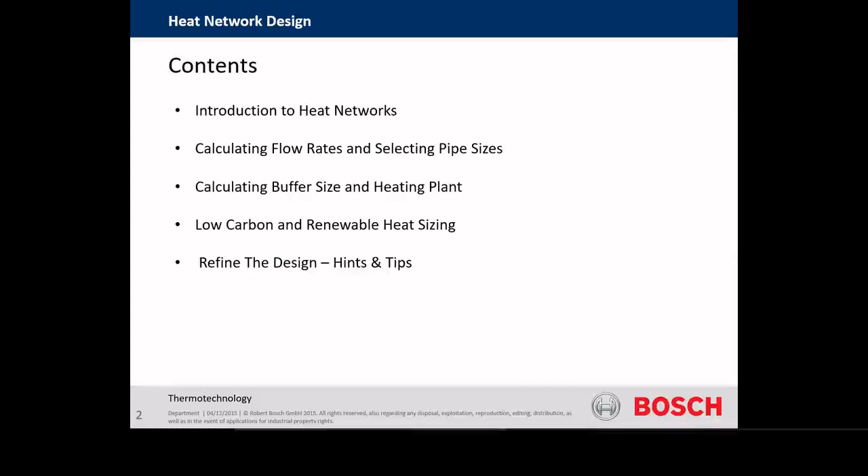So heat networks, well, as I say, probably everybody knows what a heat network is. I think it's interesting to see where heat networks fit within the decarbonisation of heat and the strategies. If we look back historically over governments' strategies for the decarbonisation of heat, at a very broad level, it pans out into perhaps three different pathways. On the one hand, we've got the all-electric pathway, which typically leads us to heat pumps as being the main technology. Some significant challenges there in getting the market going, but also concerns about how the existing grid would be able to cope with that. So some significant challenges in all sorts of areas there.

On the opposite side, on the other hand, we have the decarbonised gas route, which really leads us to hydrogen with blends and then eventually 100% hydrogen, something that we're very much involved with through Worcester Bosch, involvement with government's Hy4Heat scheme, etc. Looking very promising, but still something that's just over the horizon at the minute.

And of course, in the middle pathway, we have heat networks, and heat networks, I guess, really seen by government as a kind of no regrets policy, something that they can be getting on with now, something that is easier to decarbonize in the future, even if they come into existence not perhaps using a high percentage of renewable heat from day one. Because they are agnostic of the energy coming in, they are much easier to decarbonize in the future. And we've seen from Scandinavia that heat networks can really be a useful tool when they're done correctly, when they're done right.

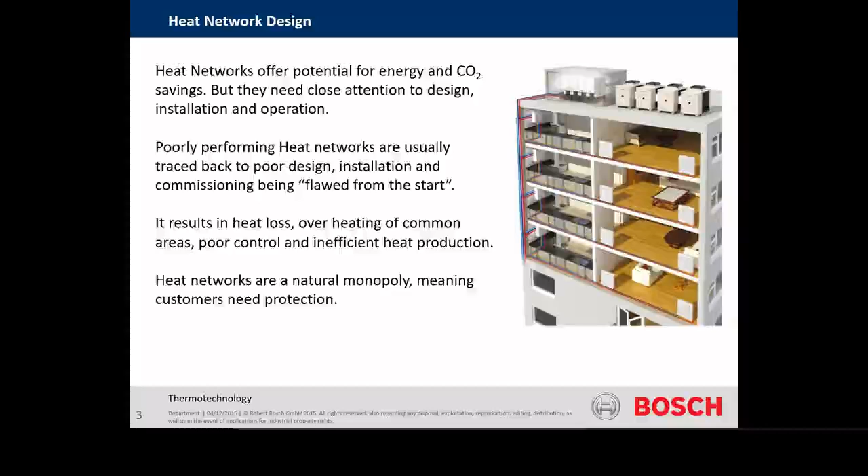So as I said, CP1 came about in 2015, as a bit of a reaction to this. It was a collaboration mainly between CIBSE and the ADE, the Association of Decentralized Energy, which is the main trade association in this area. They came together to produce this document as CIBSE's first code of practice, hence its CP1 name. So it's a little bit different to other CIBSE guides we're perhaps used to seeing.

Being a code of practice, it looks more at the stages of how to go through procuring and looking into the feasibility, etc., for a heat network. I think there was some criticism when it first came out that it wasn't a technical guide, and there was perhaps a need for technical guidance that was missing at that time. I think CIBSE and ADE subsequently came back and had a go at trying to put together a technical guide, but that ran into the sand for various reasons, people not being able to agree on the approaches that should be taken. It became quite difficult to get anywhere with that.

CIBSE also had a go at this, and for various other reasons that also petered out. In the meantime, a guy called Chris Parsloe put together a technical guidance document - he was also the main author for the CIBSE guide. I've got no connection to Chris Parsloe, but I think his guide is probably a useful stopgap if you're looking for some good technical guidance. And I understand CIBSE are looking to adopt that guide along with the next version of CP1 2020 as and when it comes out.

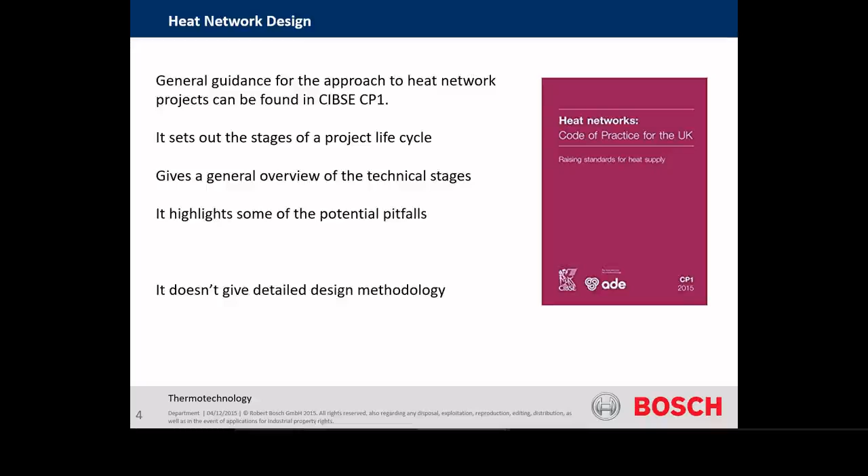So from this point on, I just want to think about a hypothetical design that we might need to do for a small heat network, and pick out some of the key stages that we go through in design, and look at a broad approach to what we need to do there.

I think certainly some of the learning has been that the approach to heat networks design needs to be quite different to what we do with standard mechanical design, in as much that there's this tendency for mechanical design to perhaps slightly over design things and oversize things, because that acts as a bit of an insurance policy - the mindset being that it gives a little bit of margin for error. But when it comes to heat networks, experience has shown there's a real need to be designing quite tightly, because if we start to oversize things and over-egg things, this leads to problems in the efficiency of the network. This is the route really where we get high heat losses and the like.

So I think the first message here is really to be sensible about what the actual requirements are for the domestic hot water flow rates, the heating requirements and the like. Because if we are sensible about this, and if we put extra effort in the front end, either through better modeling of what the requirements will be, or if it's an existing network or property that's going to be put across to a network, then we could perhaps consider some better metering and things like that going in. Certainly the more work we can put in at the early stages will pay dividends going forward.

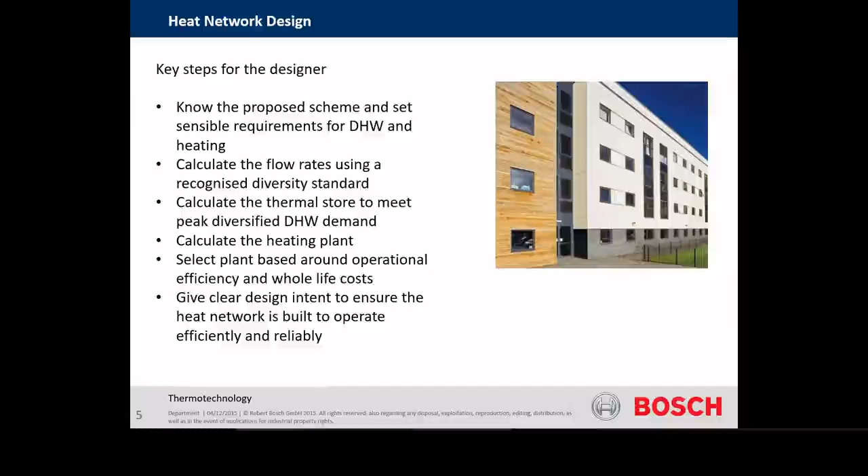So if we were going to think about our design for this small heat network, then perhaps not a bad place to start would be to be looking at the heating in the apartments. I called it the secondary heating here, but that's actually been redefined to the tertiary heating system. But I will perhaps continue to just refer to it as secondary for this presentation anyway.

When we think about the heating, CP1's original advice was to just calculate your heat losses as normal. But I think certainly the data that we see coming out of heat networks now, we're starting to see that is leading to oversizing of heating. So the advice within CP1 2020 will be that there's two routes that you could potentially follow.

You could either calculate your heat losses as normal, but then apply a diversity to the heat losses. And they've identified a Danish standard called Varmeståbi, which could be used and actually has been used by a lot of the larger heat network operators in the UK for some time. So it's pretty well tried and tested.

So you could use that diversity method, or the alternative method that they're pointing out is that you could calculate your heat losses, but don't allow for unheated, unoccupied spaces either side of where you're calculating the heat losses for. So assume 100% occupancy and think more as a block really, and hopefully that will also help you reduce your heat demands and therefore get closer to what the reality is really.

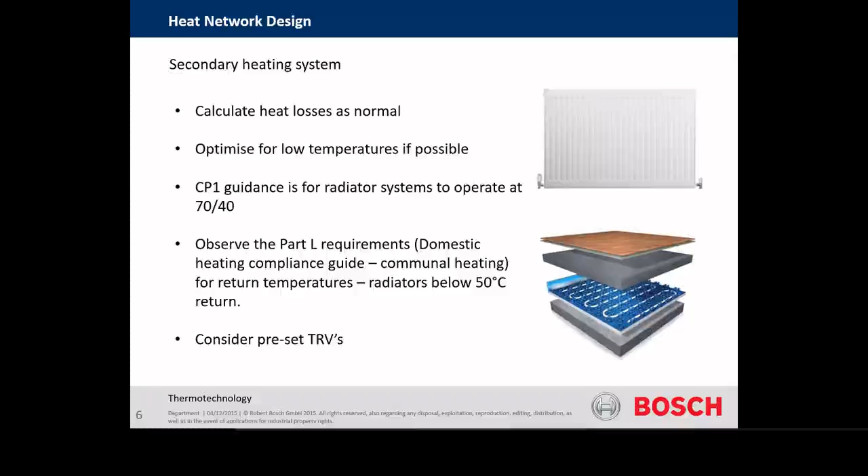So I want to turn to the domestic hot water side now. I think the key thing to take away from this is to be realistic about what your actual requirements are. We've seen in the past, perhaps not so much now, a lot of oversizing going on - we went through a real phase where people were wanting like 100 kilowatt HIUs, and you think, what on earth are you doing with these huge great HIUs to require these massive flow rates? It has been a problem for some time, and CIBSE have tried to address this in the new version of CP1.

There's a piece of work that was adopted from Hugh Blakewell - I think he's from Islington Council. He did a nice paper where he looked at combi boilers as a proxy for heat interface units, saying, if I was going to do this size of apartment with this number of beds and bathrooms, I'd only be using a combi boiler of a certain size, maybe 28 kilowatt or 24 or whatever.

You could use that as a proxy for your heat interface unit. They've adopted some tables from Hugh's work and put them into the new document, which I think will be a good starting point if you've got to have that conversation with your client, maybe if they're thinking they need really high hot water flow rates or something like that.

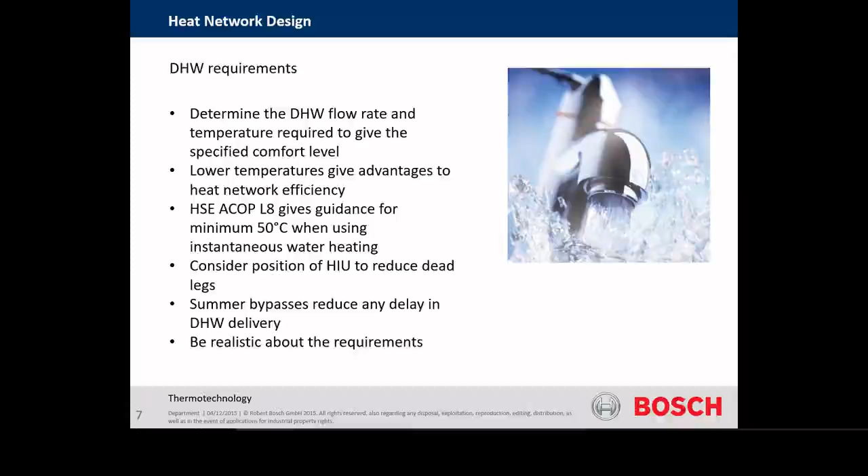I think when the consultation came out on the changes to CP1, which must be nearly 2 summers ago now, when that actually came out for the first time, there was another standard that was proposed based around the British standard for consideration. But I think there was a certain amount of feedback that came back from the industry, really saying that they felt we really needed to remain with DS439.

But I think what's been discovered is that the broad method that was outlined in CP1 originally relating to DS439 was actually a method that is really designed for plant sizing rather than pipe sizing. And so what's been proposed, and what's coming out in the next version, is that we stick with DS439, but we'll actually use the alternative method in there, which is designed for pipe sizing.

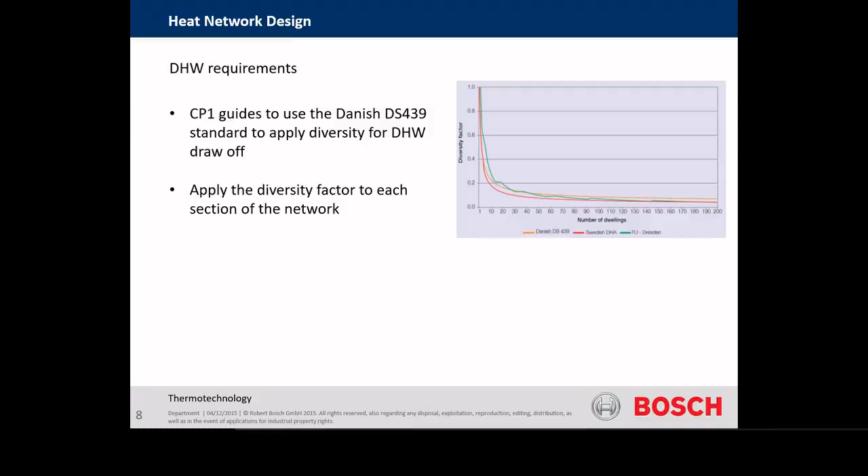So we've got quite a bit of our information together, but we need a little bit more information before we're ready to start doing any calculations. And we need that information from the chosen heat interface unit that we're going to be working with.

So you could perhaps look up this information from manufacturers' manuals and data tables and things, and some manufacturers have these nice graphs that you could perhaps work it all out from. Can be a little bit fiddly, and perhaps there's times when you're left thinking, well, I'm not 100% sure whether I'm doing this accurately.

So my advice really is to just go to the manufacturer directly and let them know what criteria you're designing to, and get the good, accurate data back from the manufacturer, so that you can plug those figures into the design, because we would need to know about the return temperatures coming back and the kilowatt ratings and things like that if we are to calculate our flow rates and things properly.

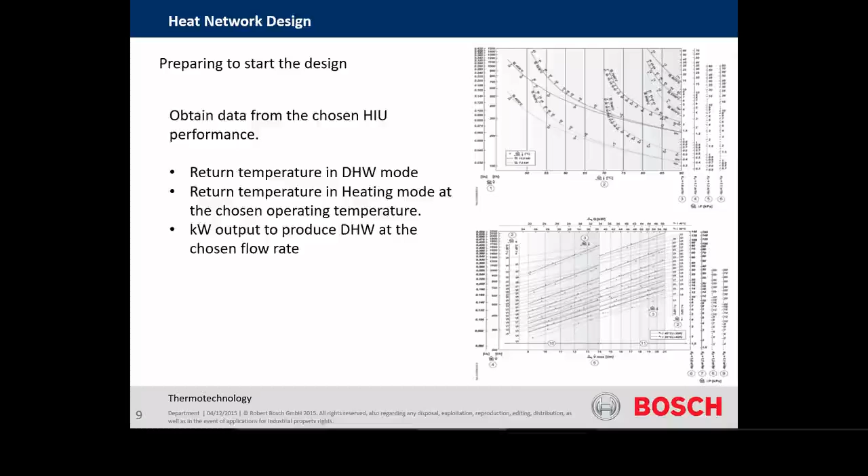So, quite an important stage, I think. We're nearly ready - we've got quite a lot of our information together. We're nearly ready to do some calculating of flow rates, but there's one more thing we've got to consider before we can do that.

It's to think about how our network is laid out. Experience has shown that a huge amount of the heat losses seem to occur on these lateral runs that are typically employed. All sorts of different reasons for that - they don't always tend to get installed particularly well and insulated well, and sometimes you get tortuous runs that end up having to be made.

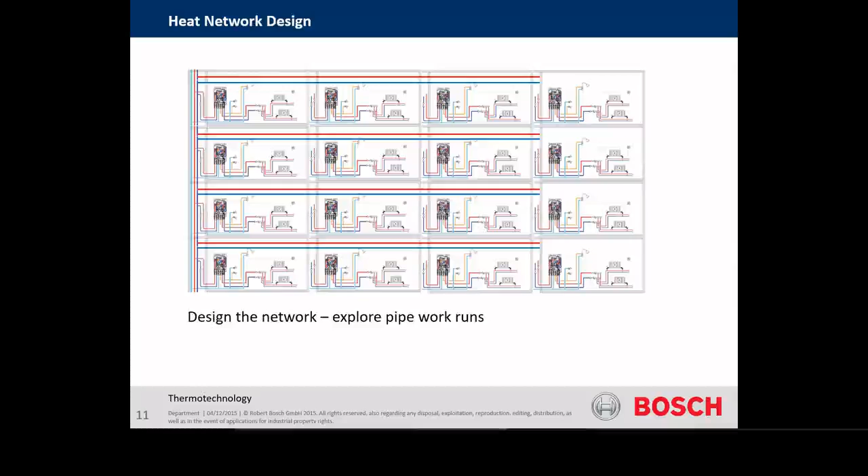So CIBSE's advice has always been to try and reduce those lateral runs if you can. Their advice has been around thinking about whether you could employ more risers rather than laterals, and split it up that way. That's great if you've got service ducts and things available, but sometimes by the time mechanical design gets to the likes of yourselves, you're already stuck with what the architect has laid out. But it's worth considering whether you could reduce these lateral runs by stacking around the risers, because we've seen that's a very good way of employing a heat network, as you really reduce your lateral runs significantly.

There's a new table going into CP1 2020 which gives a breakdown of the heat losses that come off a typical heat network, and the laterals account for 70% of the heat loss on a heat network. So it's really an area to focus in on, because that's where you're going to get the best effect.

We've certainly seen examples where people have managed to stack HIUs around risers and have actually reduced their heat losses by over 50%. It's really significant, because heat loss is the thing you're continually battling against as a designer. So something to think about there if you've got that flexibility.

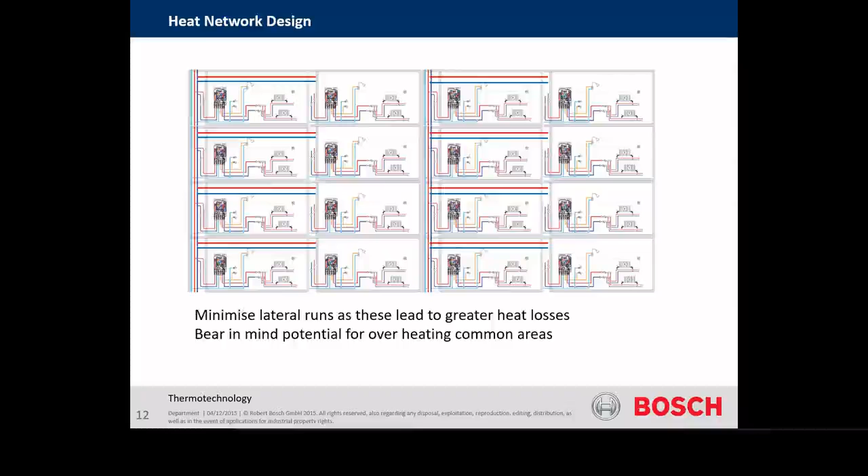So finally, we know how a heat network's going to be laid out, and we can start doing some calculations for flow rates. There's different ways of doing this, of course. In our very simple example here, we've just got a method that's been out there for many years of assessing your flow rates for each individual leg.

So we can work our way back from the extremities of the network. We know what the flow rate requirement is for the first HIU, because we can get that from our manufacturer's data. As we go further back, we can then start to apply a diversity factor. So when calculating this section, we'll apply a diversity factor associated for 2 HIUs, then as we go back for 3 and 4 and so on, working our way back through the network.

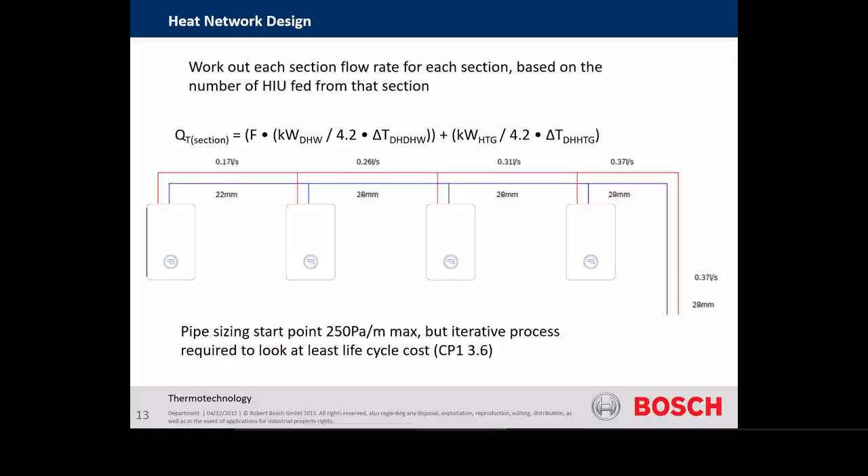So we can work our way back through in my little hypothetical design here, applying the appropriate diversity factor as we go. We know we had a diversity factor for 4 here, then 8 on this leg, and 12 and 16, and so on, as we go back right the way through the network until these two sides

here join, and we get to the energy centre, by which point we should then have a total diversified flow rate for the network as a whole, and we can then start to turn our attention to the energy centre, which is where we are now, really.

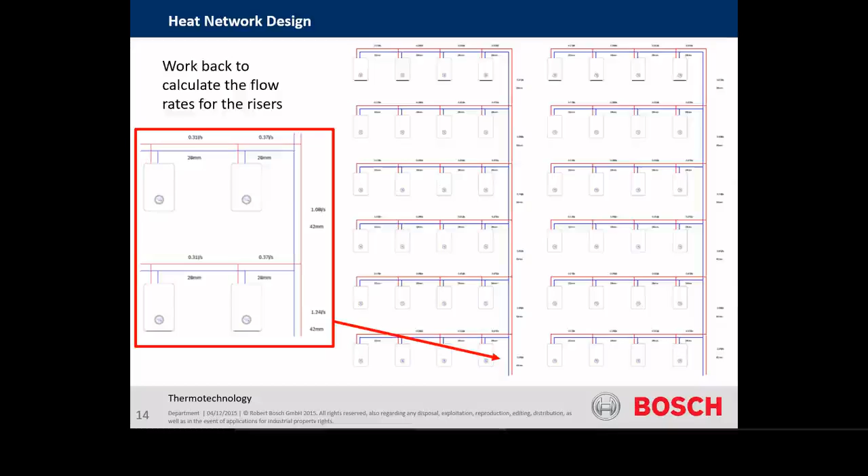So when we come to the energy centre, the first stop-off point for us really is to look at the buffer sizing, and I think it's important to just think before we dive into this about why we might need a buffer vessel on a heat network, and whether we do or don't need one. In my opinion anyway, opinions differ on this, but I think in the vast majority of cases a buffer vessel is certainly required and certainly beneficial.

It's really there to deal with the peak domestic hot water demands that come onto the network, which tend to be transient. And I think if you ever go to a heat network where there isn't any buffer vessel, what you find is that the heat generating plant, be that peak load boilers or whatever, is typically in just disarray. There's no strategy going on.

What happens in reality is that when a demand comes onto the network, the flow temperature starts to drop down a little bit, and the BMS says, okay, let's bring on a boiler. The first boiler thinks about it for a bit, maybe goes through its pre-purge, lights up, comes in on low modulation perhaps for a period of time, and then slowly starts to ramp up.

By this time, the temperature on the flow has already dropped further down, and the BMS is saying, okay, bring on another boiler, bring on another boiler. And before you know it, all of your strategy is gone. All of your boilers and things are on when they shouldn't be, and it's just complete disarray, really.

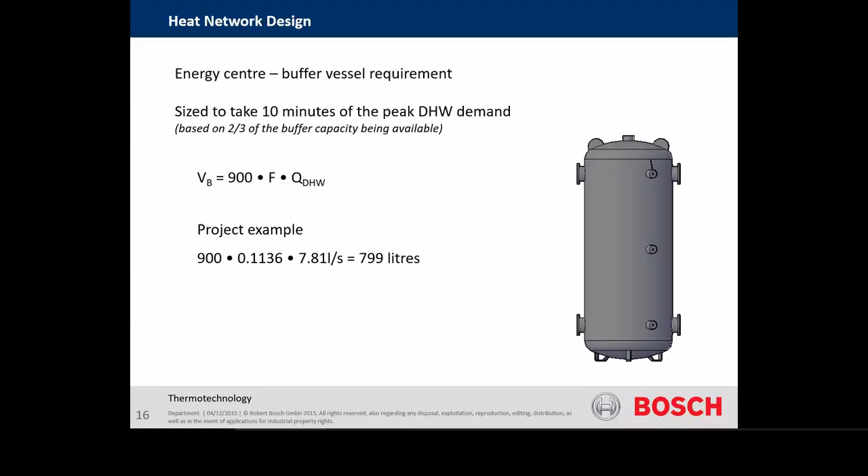So once we've got our buffer vessel together, we can start thinking about heat generating plant, and in this case we're looking at the peak load boilers. What do we need to be able to pick up the demand here?

Well, again, in my simple example, I've said that we need to cope with all of the heating coming on together, and of course if we were diversifying that, we would add that diversification factor into this section of the equation as well. But what you realize is that once we've got the buffer vessel in place to cope with the domestic hot water demands, then all we actually really need to do is reheat that buffer vessel back up within a reasonable time period.

And a reasonable time period has typically been taken as an hour. I've never really seen anybody have any difficulty with that, but you will see some variance. Sometimes my colleagues in Germany actually design around half an hour there, just the way their market has developed, I think, and seems to be the norm. But as I say, I've never seen anybody have a problem with that. So you can plug in your values for your scheme, and out we come with a value for the kilowatt requirement that we would need for our boiler plant in this case.

Some things to say about this, really. The first is that this is the minimum requirement, and it doesn't include any redundancy in this figure, so we need to think about how redundancy is going to be tackled on your given project, whether you adopt that in perhaps an N+1 way, or some other strategy, but it certainly needs to be considered.

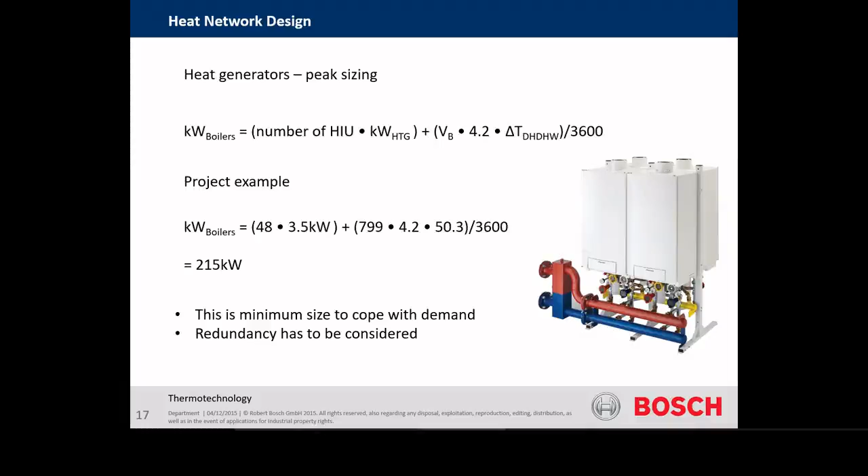So we looked at the basic bits and pieces of the energy center, but of course, one of the key reasons to use a heat network is that we can perhaps adopt renewable technologies a little more easily than at the individual dwelling level. Sometimes that can be quite challenging, but accumulating them together and having a much larger system can be easier to deal with.

I think it has to be said that over the last decade or so, CHP has tended to be the bedrock of low carbon energy into heat networks. But as we go forward in a world of SAP 10.1, where the electricity grid is decarbonizing very quickly, CHP looks to be very challenging going forward in carbon terms, and I think we're much less likely to see CHP being the key heat energy generating source.

I think probably the default will now go to heat pumps, because that tends to be perhaps the next technology that could be applied a little more easily. There are still some challenges with that, without doubt, and we'll talk about that a bit more in the next slide.

If you look to government aspirations, they would like to see a lot more waste heat going into heat networks. It's one of the unique features of heat networks that they could use waste heat as their main source or a supplementary source. If you go back historically, waste heat was probably the catalyst for heat networks being produced in the first place, so it naturally sits there.

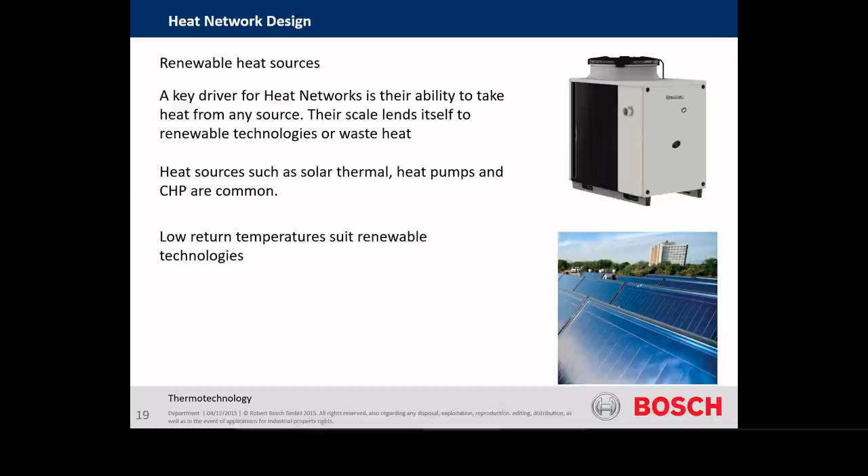Just a little bit more about heat pumps, because one of the things CP1 has always pointed out is that there's a case for thinking about hybrid systems with heat networks, and the impact this can have on the capital cost of your network. It makes no sense to have all your peak demand and maybe redundancy as well built into expensive heat pumps, which would really bump up your capital cost. There's some genuine concern from government here too - I've seen from BEIS concerns that these higher capital costs could push some heat networks into the not-viable zone.

So it's certainly worth considering hybrids here, because experience has shown that typically with a coverage from your heat pumps of around 40 to 60%, depending on the heat network, you can actually cover the vast majority of the kilowatt hours under this graph - maybe 80 to 90% of your kilowatt hours just by having a smaller proportion of your heat demand picked up through heat pumps.

So, your base is covered by heat pumps. Then on the small number of days when you really need these high outputs, boilers can kick in and pick up the demand—probably at times when air source heat pumps wouldn't be operating at their most efficient anyway. So it's worth considering; still the message in CP1 around that. It can have quite a significant effect on your capital costs.

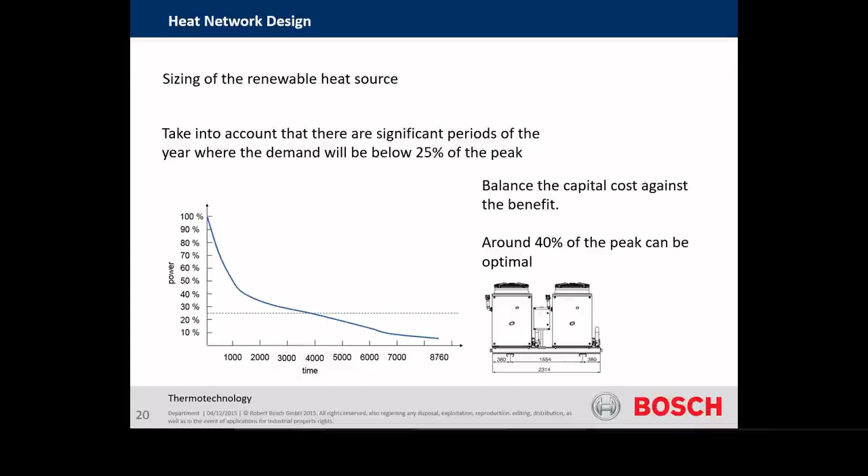So I'm just going to finish up with a few quick hints and tips on refining the design.

First one is around variable flow pumping, and I have to apologize here because this was put together back in 2015, so I can't imagine anybody not doing a heat network these days without variable flow pumps. The point I'd like to make is that when you come to pump selection, you need to think about the same thing as with heat generating plant—that it's going to be operating at low points for big chunks of the year. So when selecting pumps and looking at efficiency, choose ones with good efficiency at these realistic operating ranges. It's no good having a pump that's fantastically efficient running flat out at the peaks; we need something that's much better at the lower end point.

The other thing that comes up regularly around pumps is concern about minimum flow rates on the networks. Because we're talking about something operating 24/7, there's obviously concern about what you need for your pump here. I think there's all sorts of various strategies here, and it's good to have a chat with your pump manufacturers.

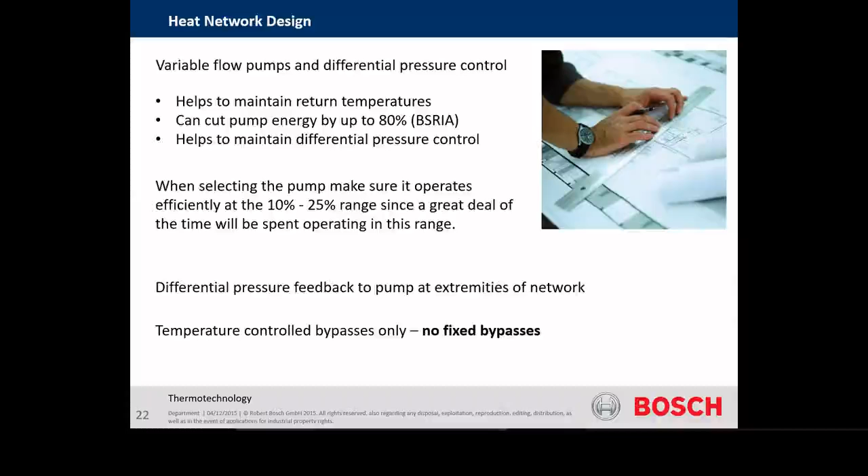But I'd also say for smaller networks, there's always going to be some minimum flow through if you've got summer bypasses on the network anyway, so that will account for some minimum flow. And a lot of the very good modern pumps are much more tolerant to no-flow conditions than they used to be.

Probably one of the key things to think about when designing a heat network is having a strategy for how you deal with differential pressure control on the network. Historically there's been all sorts of different methods employed. But the key thing you're trying to avoid is that all heat interface units have control valves controlling the flow through the unit, and they'll have some kind of maximum differential pressure they can withstand. If you go above that, you start to get pushed through the valves and get things like phantom meter readings—people going away for the weekend and coming back to find they've used energy when nobody was in the apartment. That can also lead to damage of your HIU and things like that. So you need some kind of strategy.

I think the most common way of dealing with that these days is around good dimensioning of your pumps, well set up—maybe not on constant pressure control so much these days, because there's been some learning from pump manufacturers, and they tend to operate more on proportional control these days. But well commissioned, well set up pumps are the absolute bedrock of this. Then a lot of designs employ differential pressure control valves adjacent to or inside the HIU, directly protecting these control valves, which are ultimately the things controlling the flow on the network.

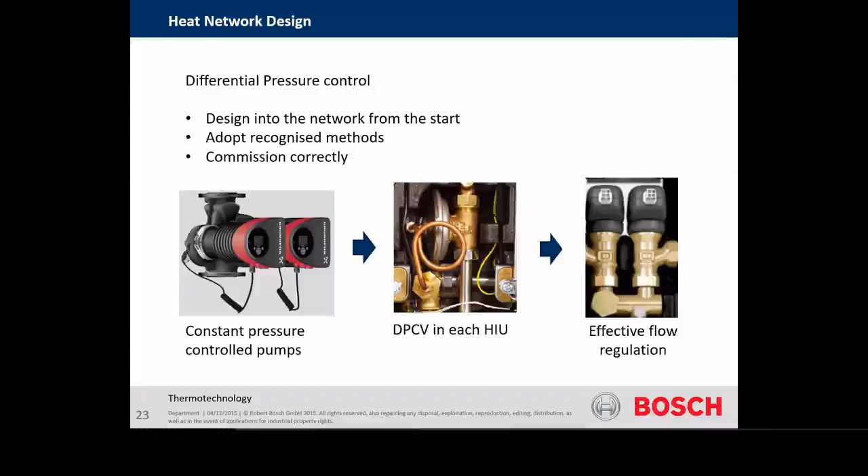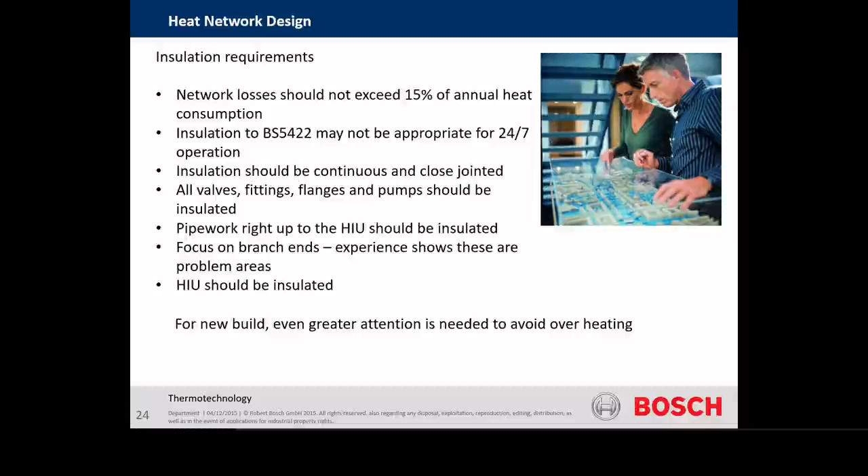Yeah, there is other guidance out there as well, but I think the guidance in CP1 will be a good starting point for trying to improve that. So quite a lot of things there really to think about.

As I said, this has really been designed around people coming to heat network design for the first time. I think there are really significant changes coming with CP1 2020, because particularly around this whole idea of acceptance testing and making the whole standard much more technically verifiable. I think naturally that will have a bit of an impact on anybody involved with heat networks and how you build out heat networks going forward.

But I think in the long run, it's imperative that we really start to tighten up on design and get good outcomes going forward, really, because when things do go wrong, it can be pretty bad outcomes for tenants.

A colleague of ours actually had to take an apartment over the summer period for a while in a Birmingham scheme on a heat network, and things had obviously not gone very well there, and the temperatures within the building - they could not get it down below 28 degrees with windows open and everything. So it can be pretty uncomfortable if you're stuck in a situation like that, and it really does highlight the need to get things right from the start.

So okay, I see that I've heard a lot of pinging going on in the chat box, Angus, so I'm assuming there must be some questions in there, but I can't see them from where I am.